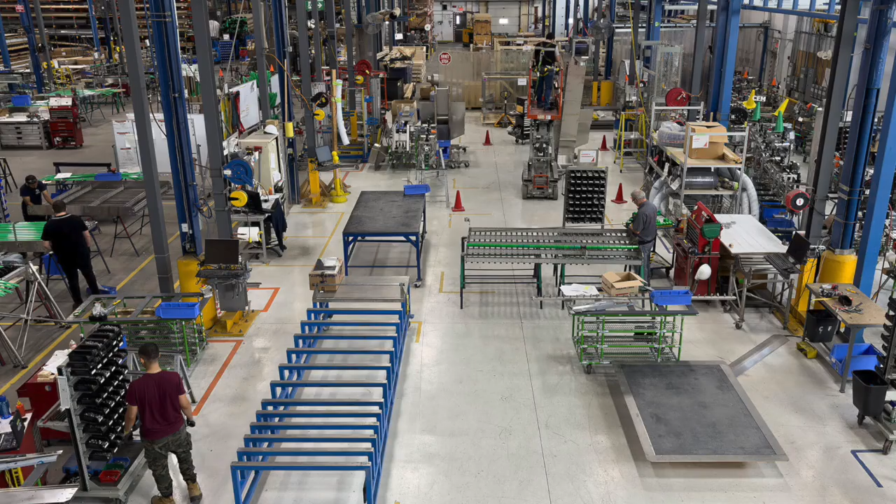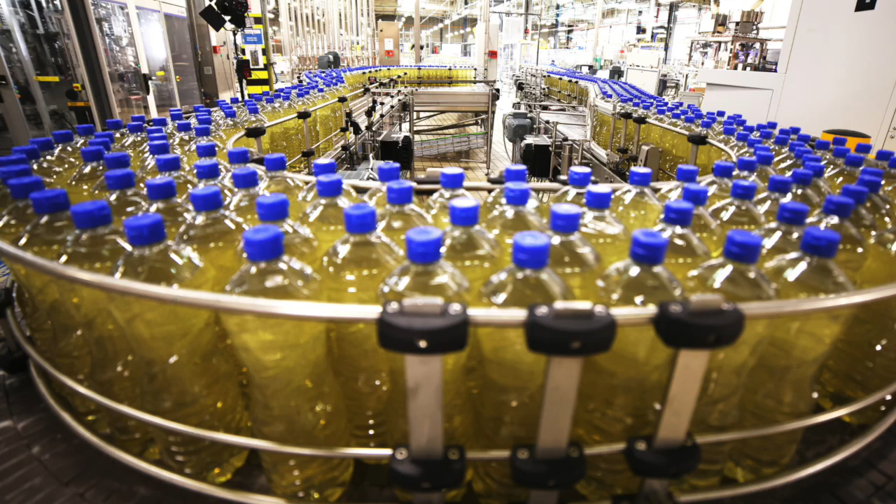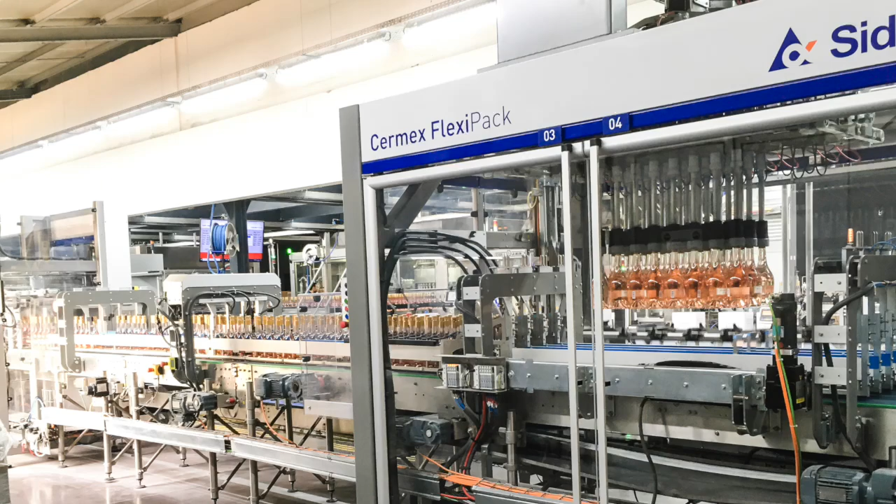We're involved in multiple industries globally. From our Canadian facility here in Laval, there are two primary market segments we manufacture and provide services for: FHPC, which is food, home, and personal care, and wine and spirits. These markets typically have very complex, custom-made solutions, and here in Laval we have the expertise to deal with them.

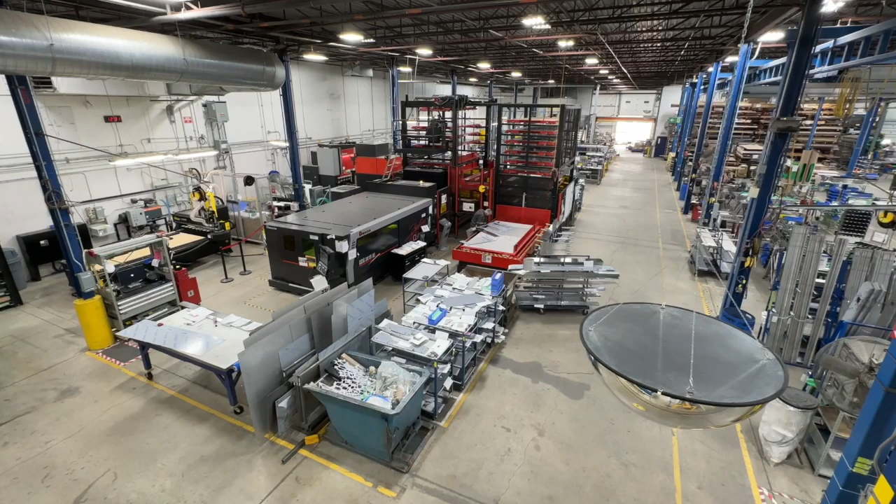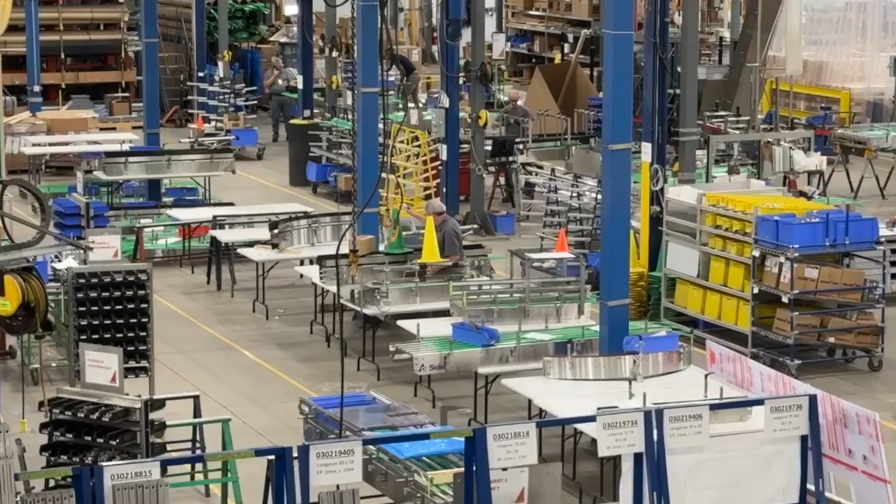The Laval facility is the only Canadian facility where we manufacture these products, which we supply to the North American market, essentially conveyors and cap feeding. We have 9,000 square meters of manufacturing and office space, and 217 employees. We also do engineering services, and we are the hub for North America for engineering services.

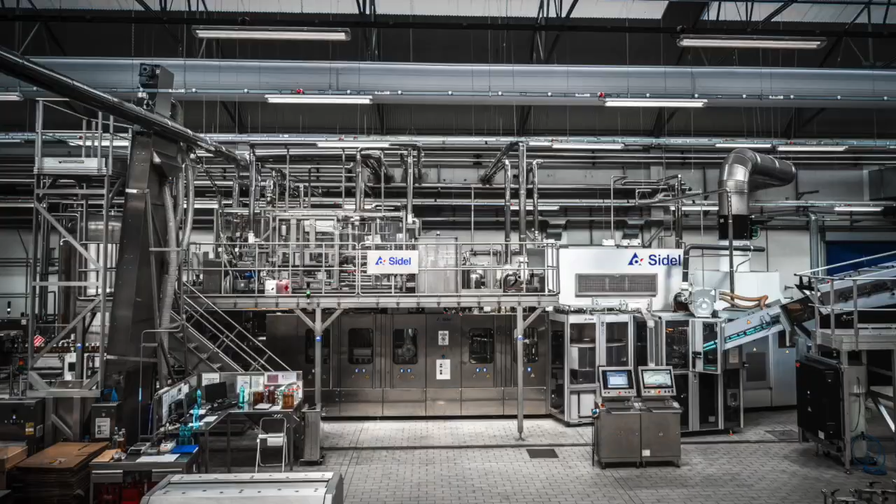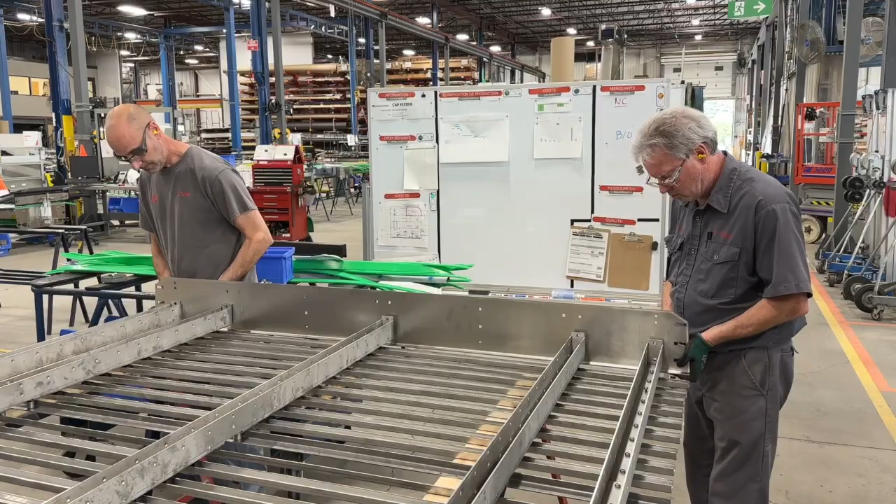Apart from FHPC and wine and spirits, we also do beverage on a case-by-case basis, including alcohol and non-alcohol beverages. That's an important part of the market here in North America for us as well. These services set us apart in that we're able to put it all together to provide the necessary equipment and services to meet our customers' expectations.

Sidel is present in more than 190 countries with over 40,000 pieces of equipment installed all over the world. Sidel Canada is our main manufacturing facility in the region.

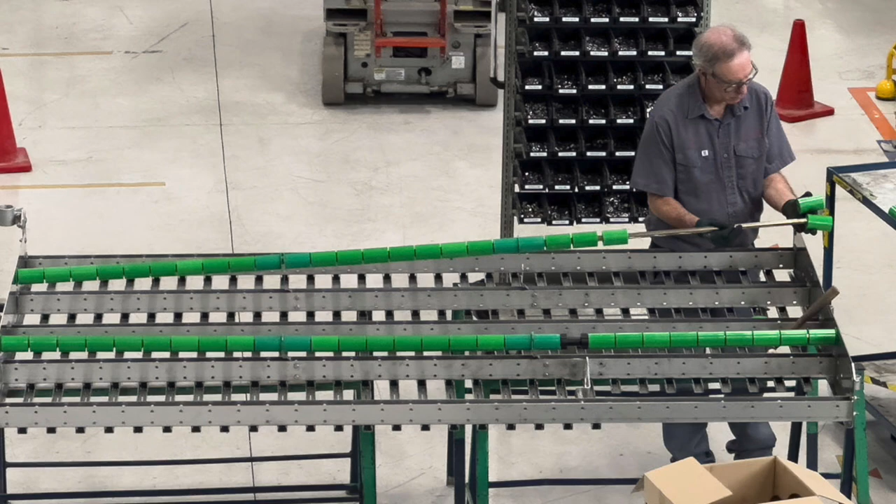When it comes to packaging innovation, Sidel has always been at the top of the chain. We are always looking into lightweighting our bottles in a smart way. We have a packaging team that sits with the customer and our marketing team, and together we define what their goals are.

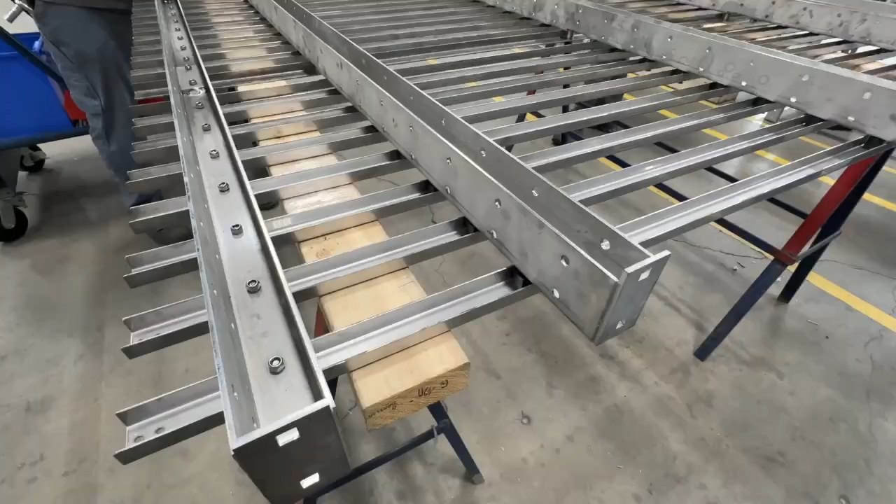When it comes to the packaging itself, there are certain aspects we need to cover. Customers tell us they'd like to achieve certain targets in terms of weight. With our feasibility tests, we can tell them exactly what's feasible—yes, we can go up to 7 grams, we can go up to 8 grams, depending on the type of product they want to bottle. We help the customer achieve those targets with our technology.

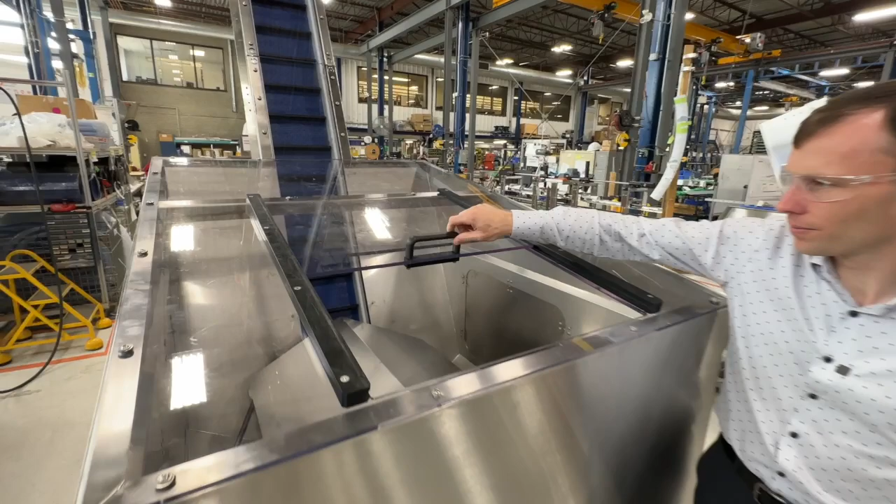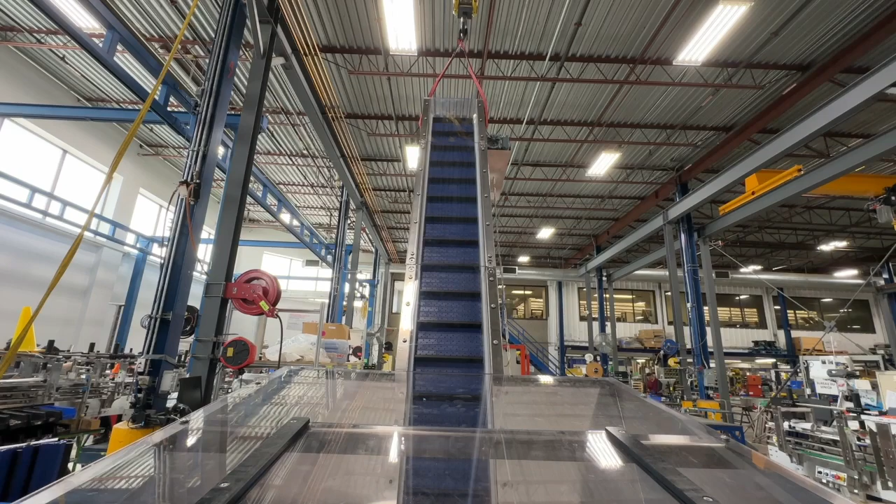It takes a lot of engineering expertise to develop equipment aligned with those consumer trends. We design and manufacture various types of stainless steel conveyors with different sizes, functions, and products we transport. The conveyors link all the machines on the line, creating synergy to maximize line performance, and are very important for accumulating product between machines to maximize performance. It could be cans, glass, bottles, whatever type of product the customer has.

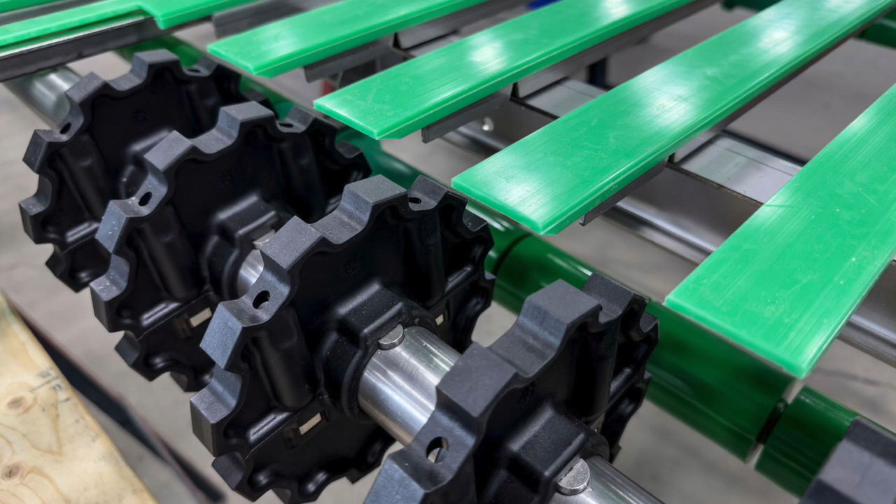We personalize all those conveyors to the customer's specifications. Safety is very important for us—internally we are certified ISO 45001, and we have dedicated people ensuring compliance of our products to all safety regulations.

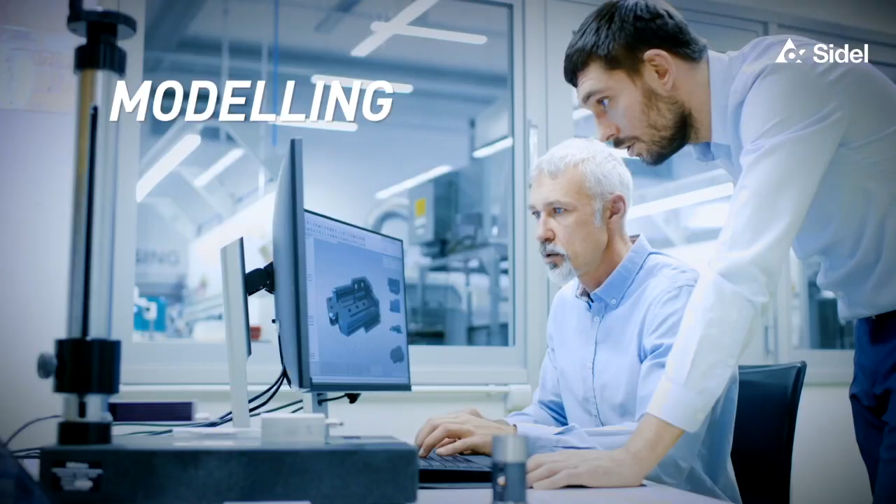The engineering services we offer differ from other companies in that we use a theoretical approach to line design, which is a proven methodology. It's designing a line with certain parameters that go into line design—V-graph, accumulation, mean time to repair, and so forth. These are the parameters that are part of our design when we put together a line for our customers.

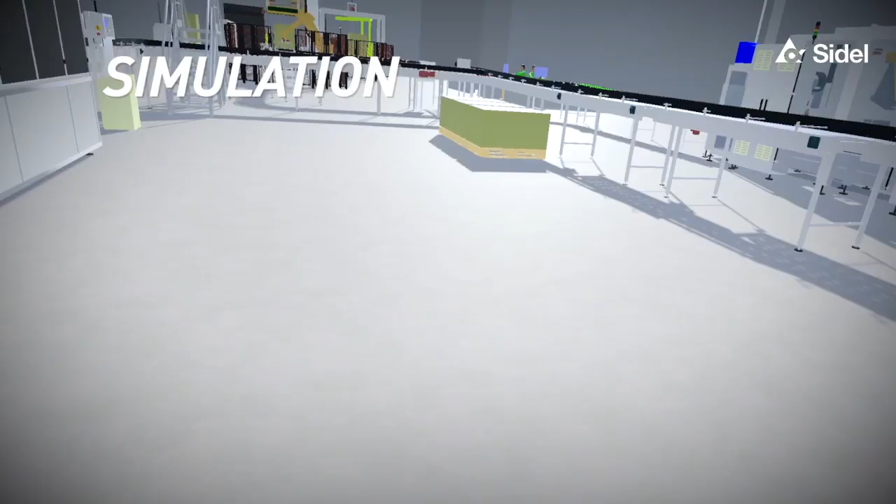What we do is simulate these solutions. The simulations allow us to give our customers a guarantee of performance, which really sets us apart from our competitors in that we can, with certainty, simulate these line designs. Once simulated, it tells us what the customer can expect from our line designs. That's very attractive to customers, in the sense that they're not only buying equipment from us, but a guarantee of performance that they will hold us to and that we will commit to as well.

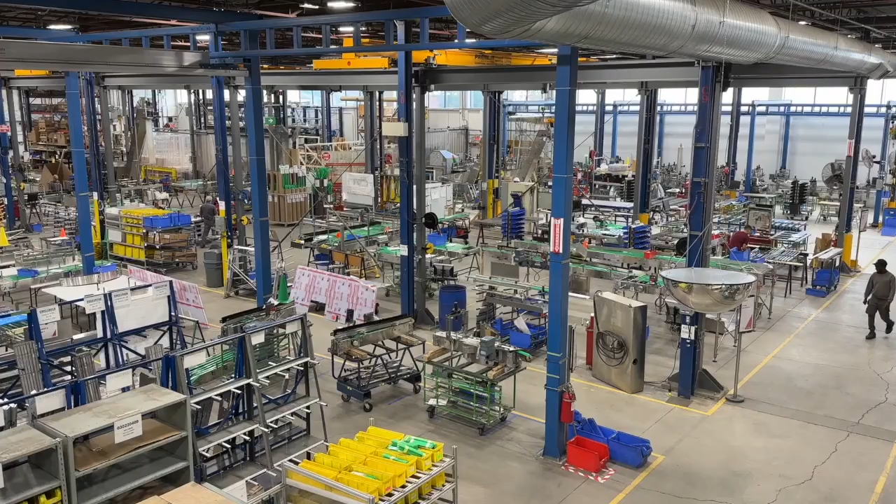The simulation tool is called Paxi. Essentially, what we do with it is insert parameters and build a model of the line. Once the line is modeled out, we run iterations and iterations of these simulations, giving us an overall performance that we can commit to our customers.

We have conveyors that are set up that allow us to test the products of our customers. By doing so, we could essentially have a proof of principle of how our line design is going to work with the customer's specific products.

So Industry 4.0 is an interesting topic. It allows our customers to be more effective, more efficient. It allows us also to respond in a more rapid way.

The way we respond to 4.0 is on a digital side. We provide virtual assistants. We provide AI at times to help us take decisions. We also have EIT, Evo-ON, which are all digital solutions that help customers to run their lines on a regular basis.

Evo-ON, which is part of our digital solution, is proprietary to Sidel, which helps in starting up lines faster, minimizing costs. With the Evo-ON digital solution that we provide, it's shown that we could improve some of the component life up to 30%, which is significant for a lot of our customers.

So less downtime, more running of your production lines, more product out the door. The feedback from our customers on our digital solutions has been very, very positive in that they've seen the benefits and allowed them to vertically start up a lot faster than doing it the traditional way.

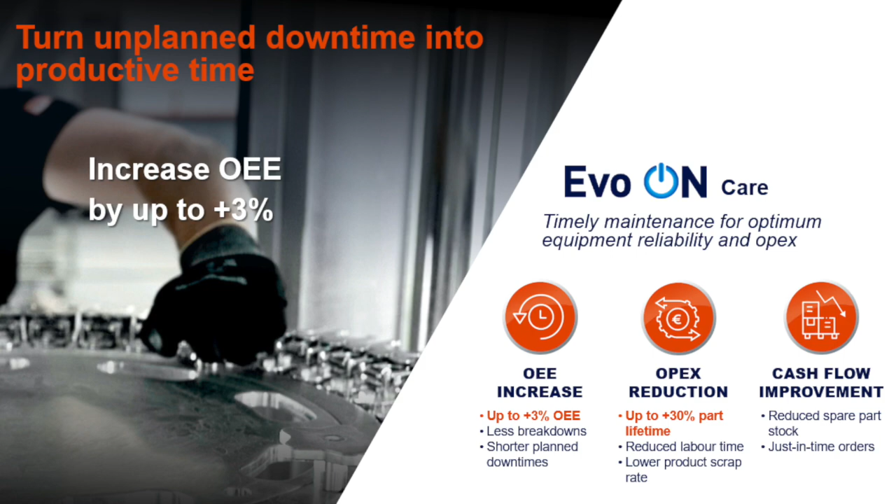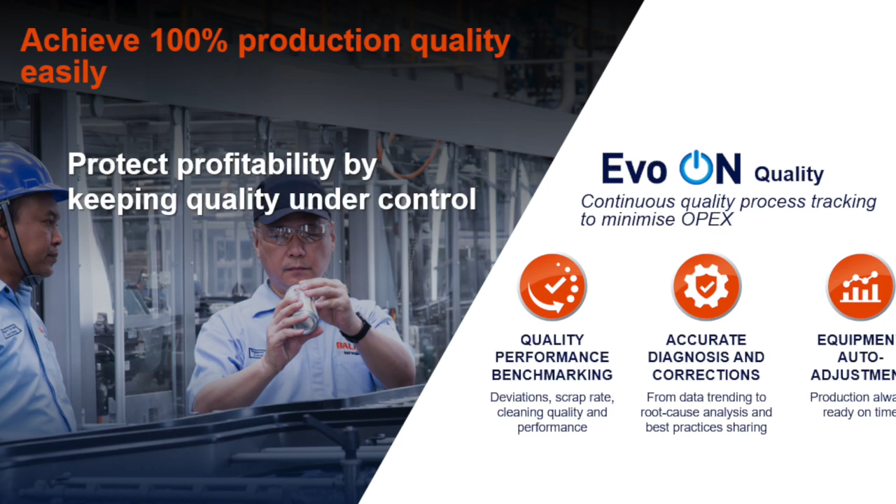Automation for our customers is very, very important in that they're always looking at how we could improve their overall line efficiencies, how we could remove some everyday manual work by automating. That's critical to our customers in reducing headcount, but at the same time increasing efficiencies.

We have over 60 project engineers, project managers, and startup and controls technicians. And one of these technicians may be available in your neighborhood today.

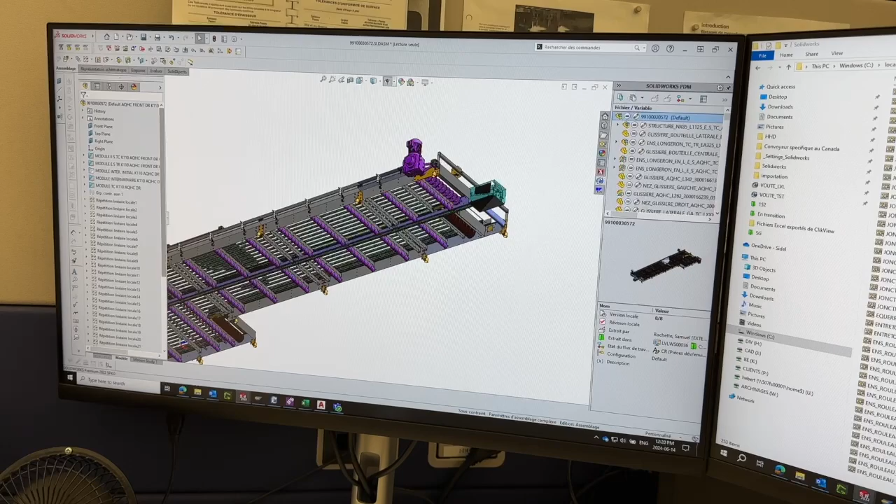We do all our drawings for parts and components in 3D. That allows us to send the documents and the drawings to our customers for them to visualize, as well as to our suppliers, and then internally to manufacture and assemble the components as part of the overall conveyor solution.

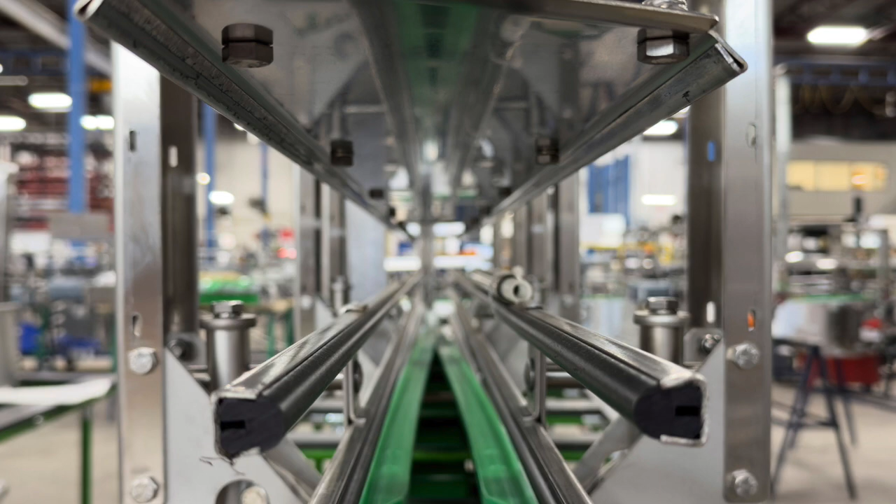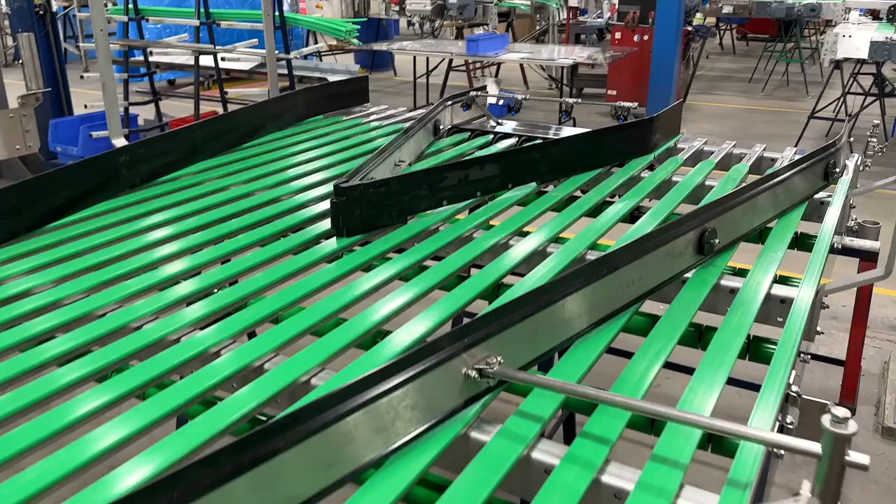This is a typical conveyor section that we build here in Laval for the North American market. In this specific case, what we're looking at is a merge table. Essentially, it merges two flows of mass containers into one. So the construction is quite simple.

What we have here is a series of modular components where we're looking at wear strips, which are these green components, as well as guide rails. When you put all this together, we have a sub-assembly of a whole conveyor section.

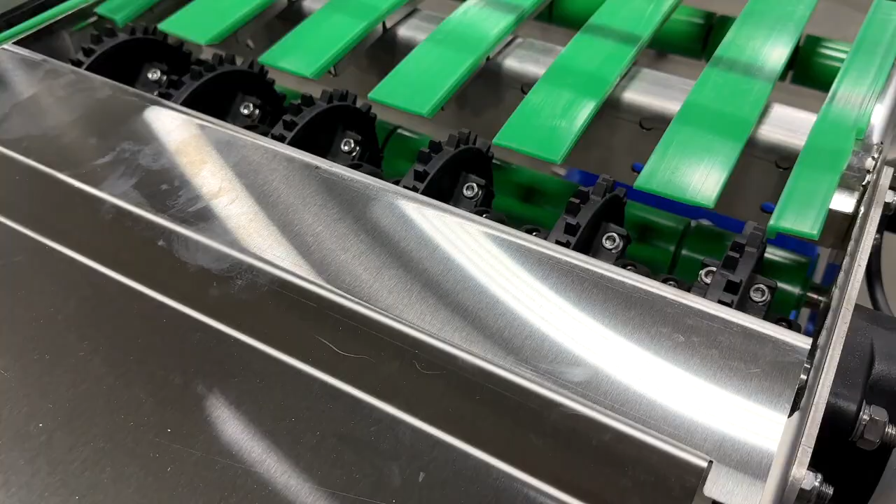Also, what we have here are sprockets, which will be pulling the belts that go on the top of this conveyor. And what we see here also is what we call decentralized drives. What we have here is a two-in-one solution where you have the gear motor and the VFD.

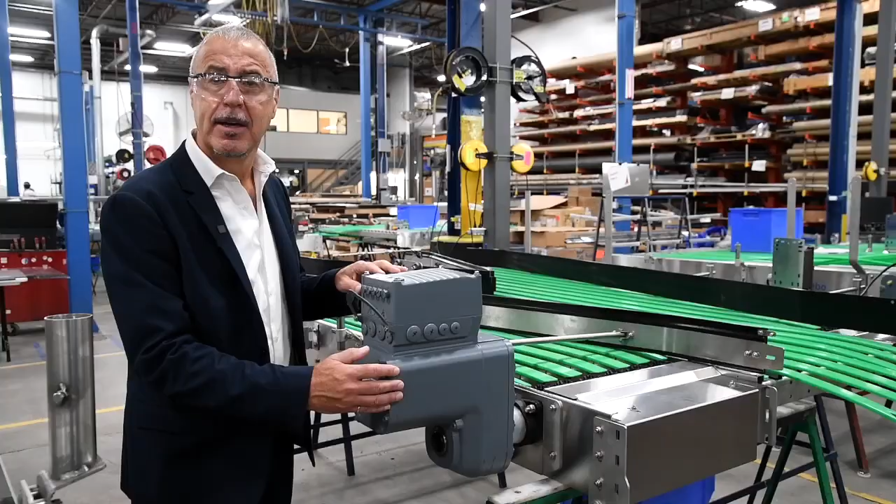Customers prefer these type of drives because, one, it allows them to install the lines quicker, and two, to start up as well much faster. So the decentralized drives that we use are from SEW Eurodrive. They're of the highest standards and are recognized in the industry for the markets that we serve.

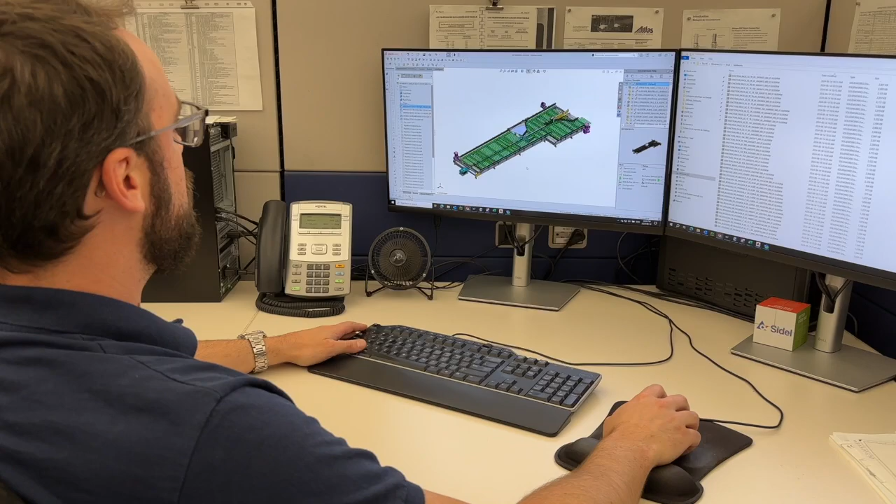So these are the latest in the innovation that we use to properly automate and control the conveyor sections. 3D design does allow us to have almost a foolproof solution in terms of manufacturing parts to minimize errors when it comes to both assembly and startup once we're starting up the lines.

And our customers have given positive feedback on the improvements that they've seen with 3D manufacturing and design.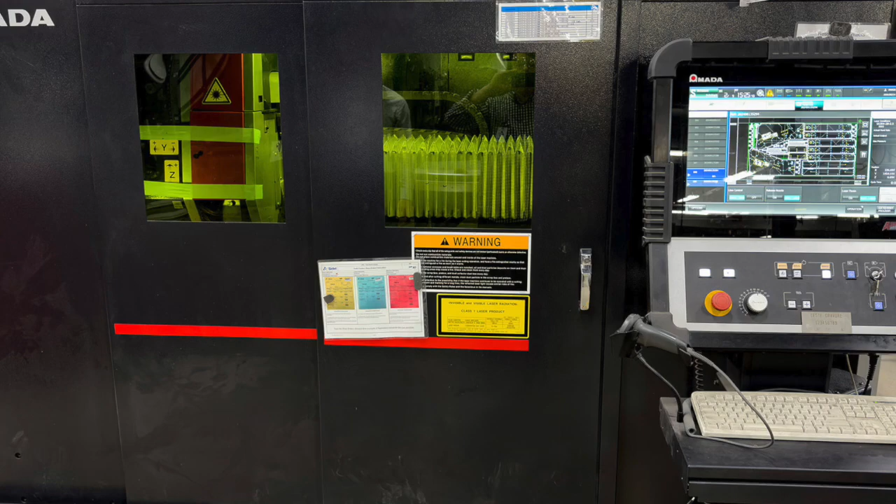Regardless of the needs and the requirements that the industry is putting in front of us, Sidel is always at the top of the innovation, and that's why we are developing equipment to be aligned with those needs. The idea is that our equipment will be able to work with thinner plastics, very lightweight preforms, and then we will be able to provide these to our customers and the industry.

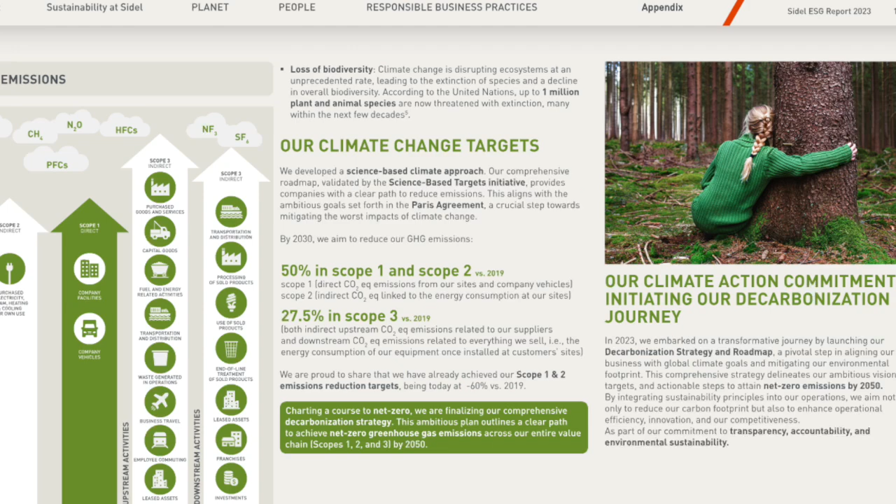At Sidel, we are dedicated to embracing new challenges and making a meaningful difference, not only on environmental matters, but also in fostering social well-being and responsible business practices.

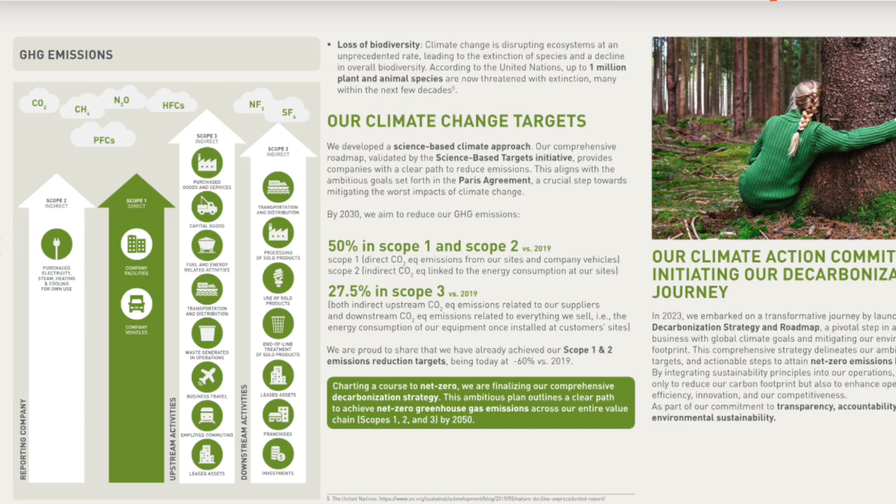Sidel's decarbonization strategy aims to reduce Scope 1 and 2 emissions by 50% and Scope 3 by 27.5% by 2030, compared to 2019 levels. We have already surpassed this target, achieving a 60% reduction by 2023.

Sidel is also working towards achieving net zero greenhouse gas emissions across the entire value chain, Scopes 1, 2, and 3, by 2050. Sidel is committed to being at the forefront of the industry trends, and we want to provide solutions that are aligned with those needs in the industry.

In our agenda, the ESG commitment is pretty high. Therefore, we are working towards providing a sustainable future, not only for us, but also for the society.